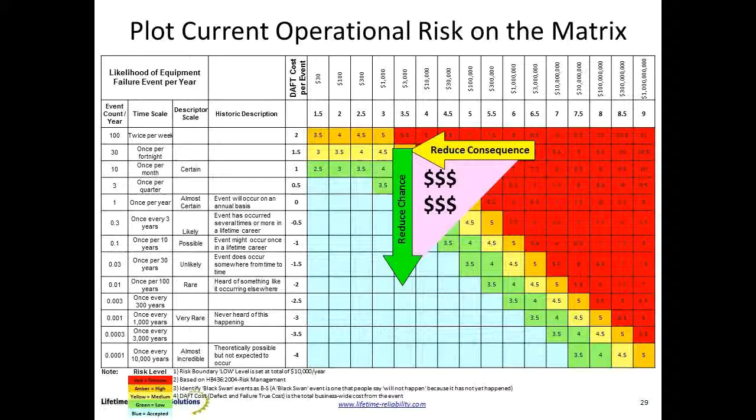So then we introduce the two options. How can we reduce the consequence if the event develops? And then, of course, the really important one, the really valuable one, the one that we work on very strongly in Plant Equipment Wellness: how do we reduce the chance?

From 1 times in 10 to 1 times in 100 to 1 times in 1,000, because that's where the big money is.

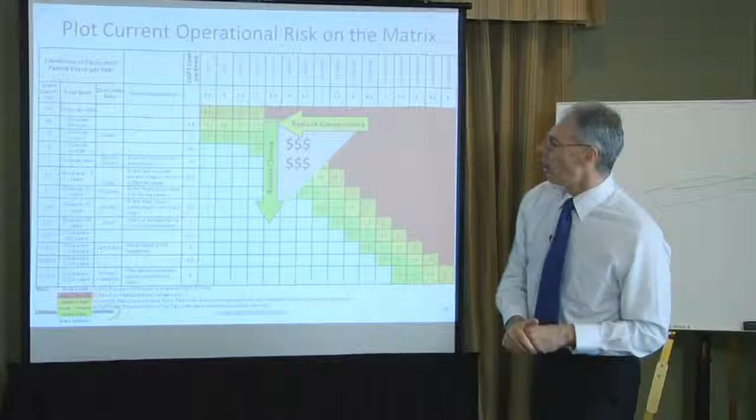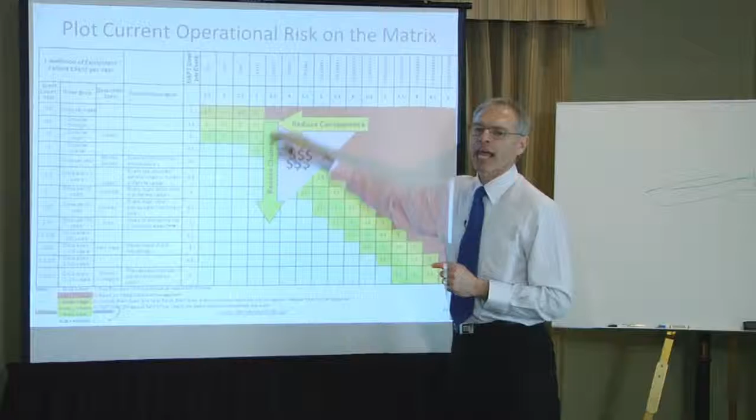And then I have a very quick way to tell my manager and my CEO how much money they can make if they do these changes. Because across here is dollars and cents, and down here is how many times I spend that money and what frequency I use to spend that money.

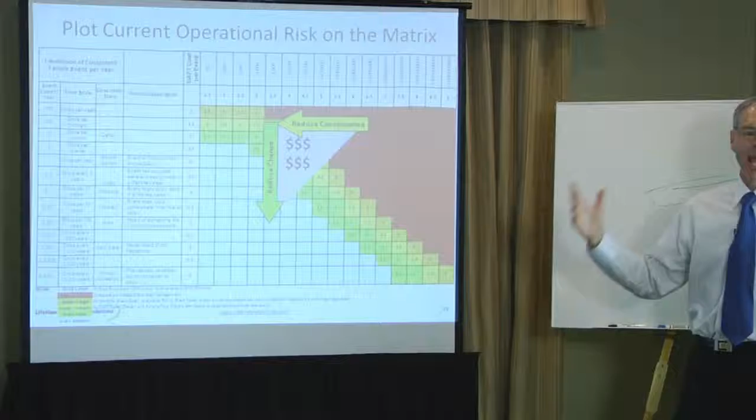And that little triangle is how much money goes into the back pocket of this organisation. Without spending hours on spreadsheets, okay, it's rough, but it's indicative.

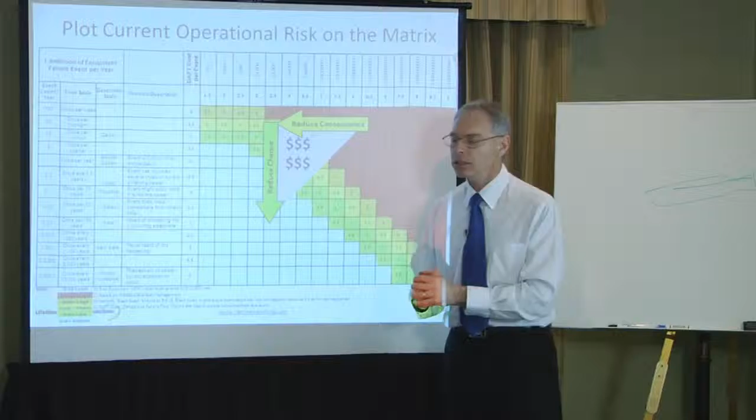If that money there is $1 billion across a period of time, I can be pretty sure that if you adopt these better practices that drive the risk of failure down, you'll get these results in frequency, you'll get this result in consequence, and you will get that money in the bank.

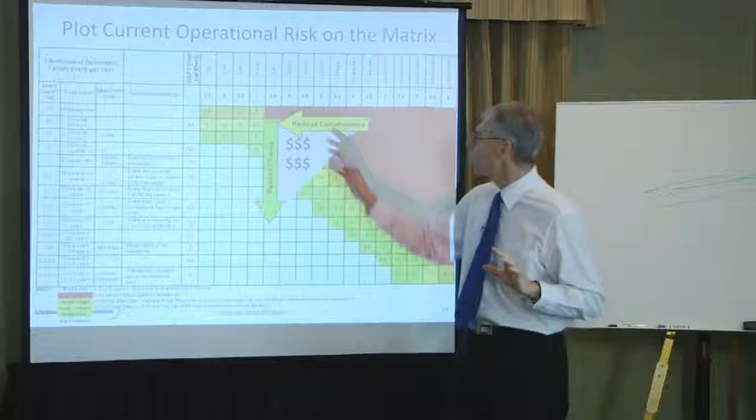Only if you make the changes. If you do nothing, then you are back up here, where you've been for the last umpteen years.

So this little matrix is a key tool in Plant Equipment Wellness, because it talks about real money and the changes you need to free that money up.

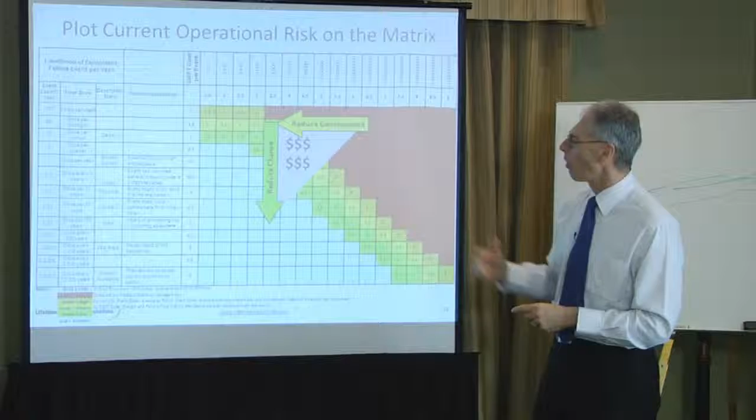Now, whether a company wants to take that change and make that decision, that's the whole point of asking the question: what do you want to do now? And if that money is of use to them, then let's do a trial on the part of the plan.

Let's put this into practice. Let's just see what it means, how hard it is, how quickly we can make this happen.